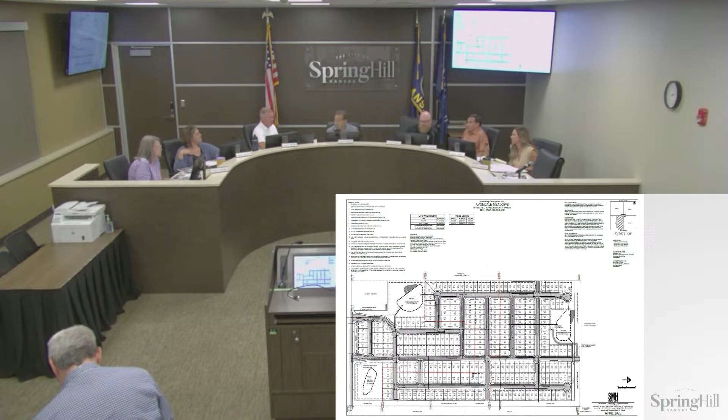Any questions? Concerns? If not, I'll entertain a motion. Move that we recommend PP-25-3 as presented by staff. Second. First and seconded, all those in favor, on the right? Aye. Aye. Aye. Aye. Aye. Aye. Aye. Seven-oh-oh.

Preliminary plat application, Garrett Ranch. So this is a proposed replat of Garrett Ranch, which is just west of the high school. In the platting process of this, a little background is that it was asked to meet the design and the standards and all of Estates of Wolf Creek, because it does flow into Estates of Wolf Creek. And when the Olsson Group submitted the first preliminary plat in, the setbacks did not match Estates of Wolf Creek.

Sometimes it's changes that they do make. So anyway, when they did the first plat, and then they came in the second plat and said, wait a minute - some of the builders were starting to say, wait, these setbacks are huge and it makes it look out of place, and we were supposed to match Estates of Wolf Creek. So that's what it is. They've come in, they've replatted. It's the same plat. There was a little bit of an addition of a couple of lots there, same type of story, detention areas, but it just changes the setbacks.

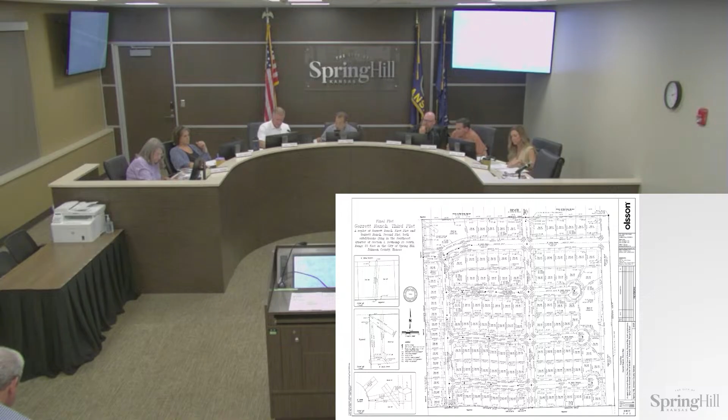Final plat, Cummins property. This is the final plat, as you that have been on the planning commission for a while know, the Cummins go in and preliminary plat, and then as they develop each lot, they final plat it due to the type of structure that might be put on there or some drainage or things of that nature.

So this is just another lot that is being platted off. Actually, two lots in this case, 8 acres. So they'll have 2 additional lots that they will start constructing on when the site plan, which is up next, is approved. It's a continuation of what they're doing there.

And one of them is the building and the other one is pretty much a parking lot. That's correct. That's on the site plan, though, for the next step.

Any comment? Hearing no comments. Stand for a motion. I move to recommend approval application FP 25-4, final plat of Cummins property, 8th plat, to the Spring Hill governing body, including any conditions as presented in the staff report. Second. Okay, first and second it.

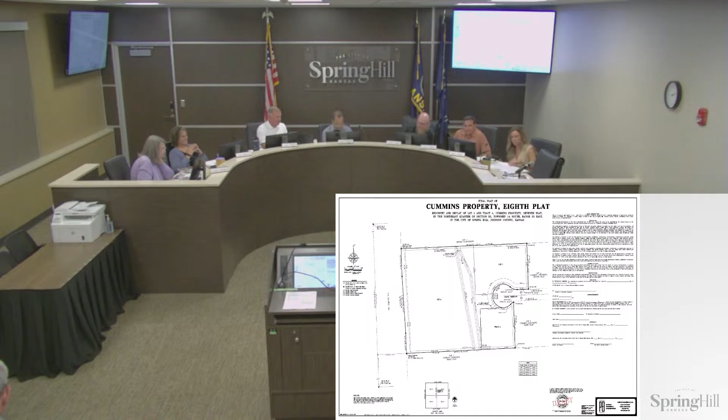All those in favor, let's start at the left. Aye, aye, aye, aye, aye, aye, aye. All those opposed? None. 7-0-0.

And site plan application, SP 25-5.

Thank you again. This is an application for the Cummins property, and it's a continuation of what they are constructing out there. This is a 24,000 square foot building that they're going to construct, it's a flex type use, office warehouse type, or just straight warehouse.

They'll build it and then rent it out or lease it. So they have several of these buildings just about the same everywhere. They did have to add some detention on this.

If you remember, that area has area detention, but it's getting to a point where some of these won't flow to it, basically. So I don't really care for these little mosquito basins, but you have to do it on some of this.

So it's all the same type of structure and plans they've been doing. They just keep finding that they're having great success leasing these, what nowadays is considered a smaller structure. It's still 24,000 square foot.

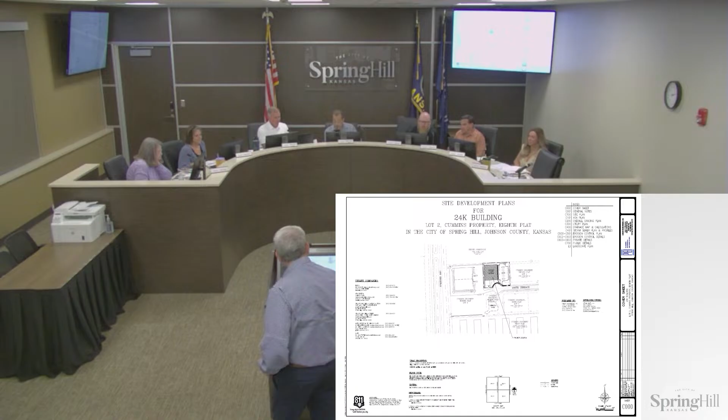Aye, aye, aye, aye, aye. All those opposed, nay? Okay, 7-0-0, approved.

Now we move on to number 8, preliminary plat application, Bonita 175. Okay, I still say it's the Carvana site. But, so it's 125 acres. Some of us have been through it several times with different site plans going through it with Carvana. And it is part of the new sewer district that is happening on the east side of the railroad tracks, and come up to serve all these properties through here.

So it's pretty easy. It's just 2 lots that it'll be divided into. One of them 60 and one of them 60.48, if I remember exactly. Just a north and a south lot at this point. As you can see, preliminarily platted.

Any questions? Got one - it looks like they're going to maintain the existing pond on the property. Is that correct? On the east side, towards the tracks? Do they use that for the site?

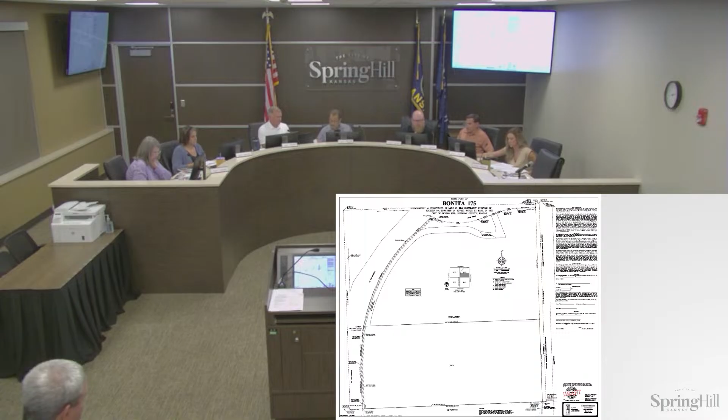Item 10. Site plan application, project Beckett. Yeah, it is called Project Beckett. It's for Lineage Logistics, and Phelps is the engineering firm. It's a site plan for the lots that we just preliminary and final platted.

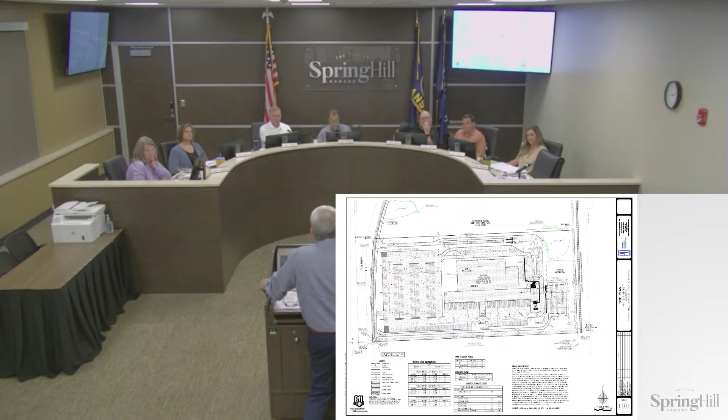So we want to look at that and talk north with the lot - meaning the company's one on 175th Street, basically - it's the last page of your packet. But right now, all the questions need to address the site plan as it is now. It's something that, if you say you wouldn't have any trouble with the same type of design, layout and all moving to the north, it saves a lot of logistic time for staff and gives more reassurance - that's what we're basically concerned about if it happens.

So, all right, we have a site plan on the south lot, or lot 1. It's approximately 60.28 acres, or 60.48 acres. There's going to be construction of a new building, 433,000 square feet in round figures. Traffic loads have all been identified.

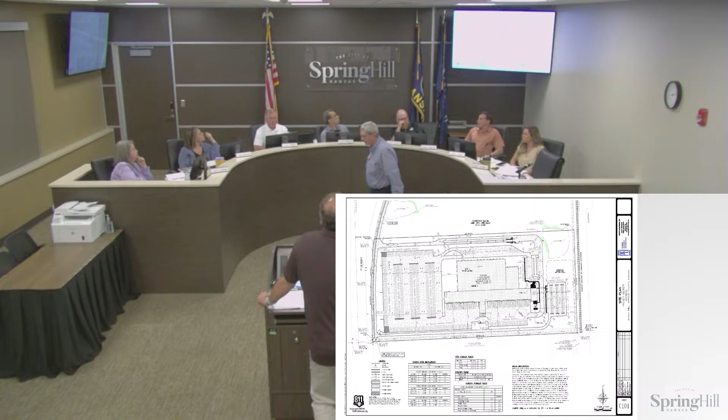Sorry, where the writing is - oh there. Back one, see it's where the writing is in the middle, that's 140 feet. And the one next to it, to the right, how much? 140. Both of those are what we call a storage box, so that's where the racking is, where the product sits - both of those are 140. And the one in front of this? Yeah, the office is about 30 to 35 feet. The loading dock, which is on the far left behind the office, that's 50 feet. So not the whole thing is that tall.

Someone mentioned New Century - yeah, that was us. Jim Jensen was the neighbor behind the property who raised an issue with Johnson County. I didn't know it got to a lawsuit, but I know the county commissioners wanted us to step in and hold him back. We did end up abandoning that project because the customer changed ownership - that building owned by Unilever was sold to Upfield.

And now Upfield is partnering with, is it KJ Logistics? I think it's KJ Logistics on the building there. So they're doing what we were going to do. I don't know how tall they're going, but that building will be going up, and it's a cold storage facility.

When you have a customer with a manufacturing facility, this would have been a plant-attached storage facility. It avoids all the trucks on the road - you just use a conveyor belt to move product from production into storage.

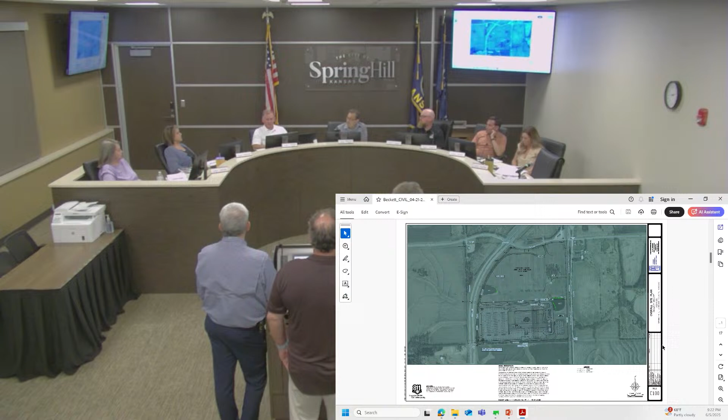Well, I'm sitting here thinking back years ago when Gardner didn't want the Intermodal - literally thinking the same thing. They turned down the speedway, they turned down the intermodal. And you think of all the growth that happened with the speedway. They turned down the intermodal, and look what happened to Edgerton. Like he referenced earlier, that's all coming online, and look where Edgerton's headed.

But is that somewhere you'd like to live? My son bought and lived in Edgerton. I mean, it didn't affect him at all. He made money off the house that he bought and did well with it. And you know that I'm not a fan of houses that are slabs - he had a slab house and he did really well with it.

He did well enough with it. He came over to Spring Hill and bought acreage and is doing just fine.

I'm just saying that I'll direct you, I think we have to continue to think outside of the box. I'm not saying I'm falling madly in love with 140-foot storage, I'm just saying we have to continue to think outside of the box, or like Kendra said, it's going to go next door to Olathe.

Well, there's a reason for the 140 foot, because of technology. And it's more energy efficient. And remember, Phelps Judd just brought up, it sits 900 feet back from the highway.

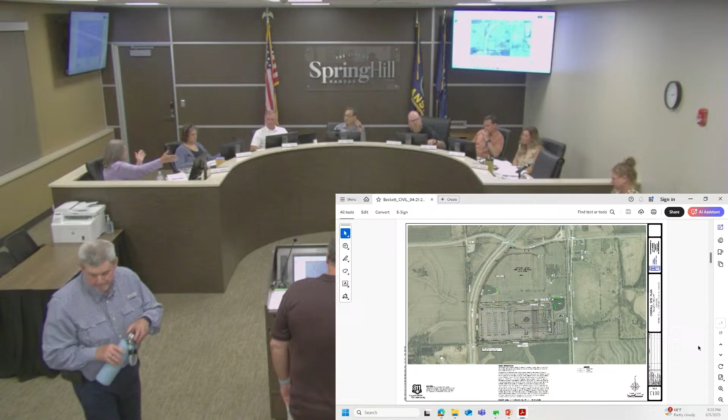I know you're going to see the height, but I'm just saying we need to start thinking outside of the box. We've got to do our due diligence at thinking outside of the box. We have talked about going to the east, south and east ourselves, but we're not ready to go there.

And that's another one that would be railroad, that's another one that would be highway, but we're not there yet. That would be putting the cart before the horse.

So where are you talking about, Cindy? South and east, down the 223rd area? No, I understand, further east, but there are improvements that are going to be made down there. I'm just saying we're not there, they would be putting the cart before the horse.

A couple things real quick, I want to jump in. So Chuck started this whole conversation off with something I think we're missing because we're more than doubling what we accept within the zoning. And I think it's the right location, the right zoning.

I do think sightline studies need to be done in some of these key locations, because if we're asking to accept something that's double what we say is acceptable, I think there needs to be more due diligence done. I'm not ready to say no, I'm not ready to say yes, but more due diligence done on the sightline studies from the intersections, from 191st, from 183rd, because I do think you'll see it from a lot of those major intersections.

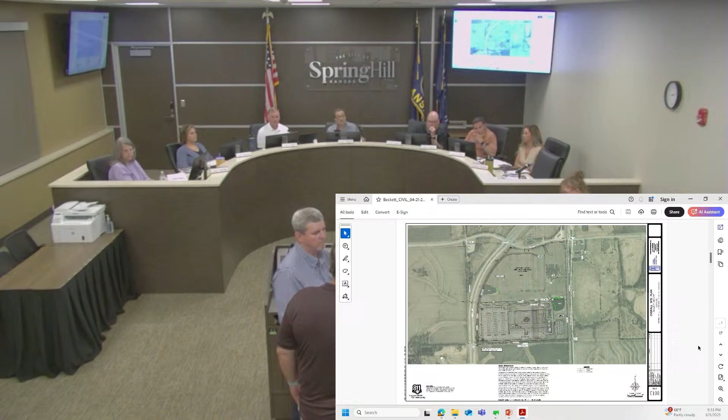Thank you, thank you, gentlemen, thanks. We appreciate you answering and being willing to go through all of this. Yes, thank you, thank you very much.

Looking for the next discussion item.

Boy, it's colorful. No, it does look colorful, it's like a bag of Skittles.

Couldn't figure it out. He's calling in backup.

That's a... that was a developer for the next discussion, and we knew it was going to be a long meeting, and it's just a discussion item. So we just said, just stay home, I'll call you and you can watch it.

So on this picture, Pat, if you can clarify, something said it was on the north side, 175th, is that right? Yeah. Okay, sorry, I got confused by your comments earlier, so we're talking about something on the north side. Yeah, it's on the north side. So this is east of Woodland, north of 175th. Yes, it's directly over the tracks, and this is what I was talking about earlier.

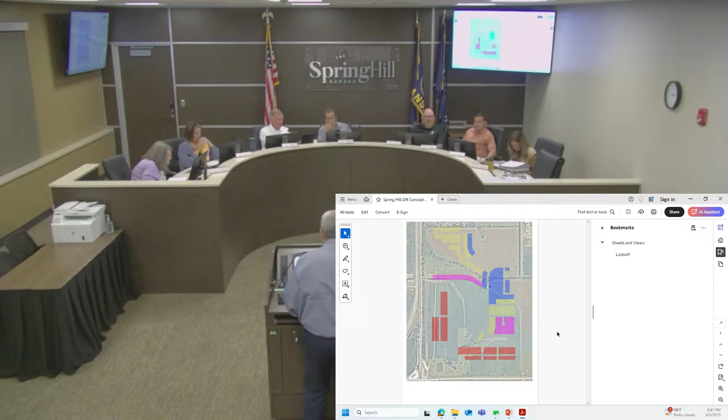Yeah, so we have townhomes at 30 by 65, duplexes at 40 by 45, apartments at 120 by 65 block. The building areas are 30 by 55, 40 by 70, and 50 by 90. Existing lot width and depth across: 40x90, 60x90, 140x140, 42x120, 52x120, and 62x120. Yeah, this is great - it's all laid in the chart there. I know it's very tough to read.

So it looks like single family, just to repeat what you said reading it again, 42, 52, and 62 foot lot widths, which I think seems pretty standard for planned districts. It looks like 40% multifamily, 60% single family.

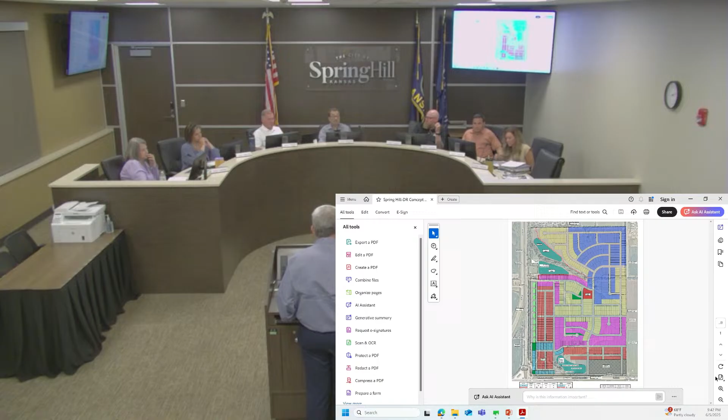What neighborhood is that up here? What's that neighborhood up in the far, I guess, right corner? I'm not sure - is it Forest Hills? I don't know. Forest Hills is closer to Merlin. I can't remember.

Okay, that's it, thank you. 2:00, lights out.

So what the developer would like is... this is serious, we've worked on this for months and months, and she's watching right now and has texted me a few things. We want to know, before getting in here, that this is something the planning commission can work with.

Then the elevations will be coming in. Did we get some elevations? I think we got a few, but we'll start working on the elevational side of it. It's a large, several phase development, but they're very confident that they can walk right through this very quickly.

We've already spoke to Waters. The sewer is going to be provided by the new sewer project that's coming. That should start in a few months. Water One, everything's good with them as far as water and all.

Personally, staff believes that it'd be a good project. I think that they're going to possibly need a little bit more commercial when it all comes about, because I think there'll be a demand for neighborhood commercial. But we can reevaluate that as things go on, because you can see up there above the commercial is duplex type, and the first row could be taken out fairly easily, or even the next, if they have to grow the commercial.

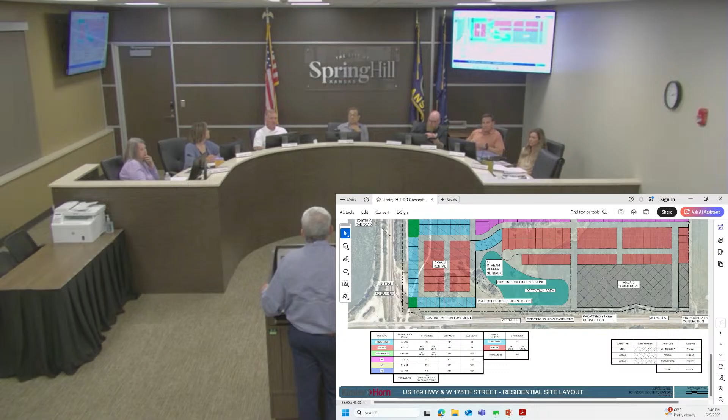Well, so let me take that back. If we can work with them to get a connection to the Johnson County trail, which is just right up there at the northwest corner, and they get that connection and all, we would be willing to trade out some park fees for that, because that's a connection that we've been trying to get forever and ever. And that would connect into the Johnson County Trail System.

And we're gonna have a lot of residents that show up. There's a subdivision over here and you have the people across the street and all, and they'll all be notified when a preliminary plat comes in. And you know how it goes. We're gonna have a lot of residents that are not in the community, are not a part of the tax base, and that's what the system's for. We have to take all that into consideration when they come in, so.

Would they consider moving or extending that trail further south? And to 175th? Yes, it's going to be. Okay.

The representation there was to make sure you knew we're going to try and connect it up into that trail system. Yeah, and you can see it's a good plan, but it's boxy, and they'll have to submit the elevations and everything for us.

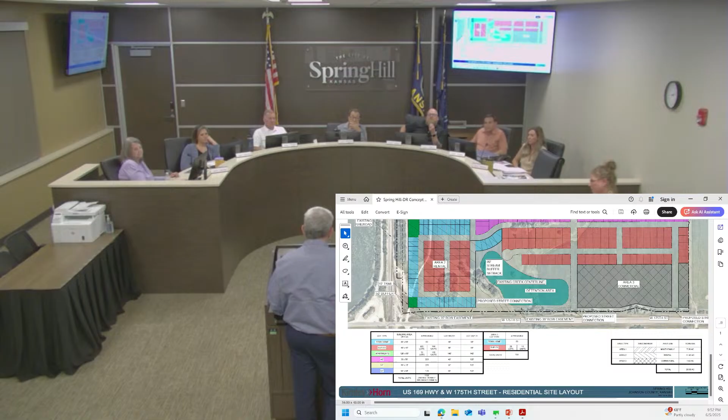We'll keep working with them on it. Hope to have a preliminary plat to you shortly. With the holidays and everything coming up, and then immediately go ahead and start working on final plats.

Maybe we can have it at the same time, some elevations, things like that. It's going to be standard for the whole area being built in the metro area. So anyway, we'll get that. There'll be a combination of slabs and basements, on and on.

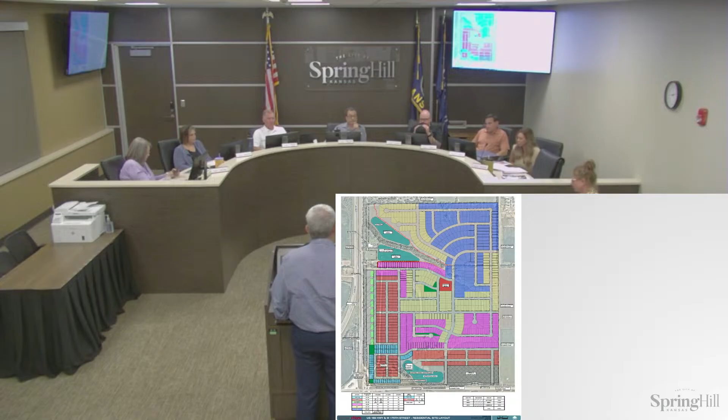All right, okay, thank you. Yeah, thank you, thanks Jenny.

Any other announcements? Can we look at the July date? It's scheduled for July 3rd right now.

Everybody gonna be available for the 3rd? No, I'm not. Josh isn't. I'm not. Tess isn't. There goes the rezoning. We'll have to have a meeting. I've sent... when's our notice time for that, for the 3rd? We'll have to look for another date. There might still be a quorum. Is there gonna be enough for a quorum on the 3rd? There's three, that's still 6 out of 9. Well, everybody will have to show up.